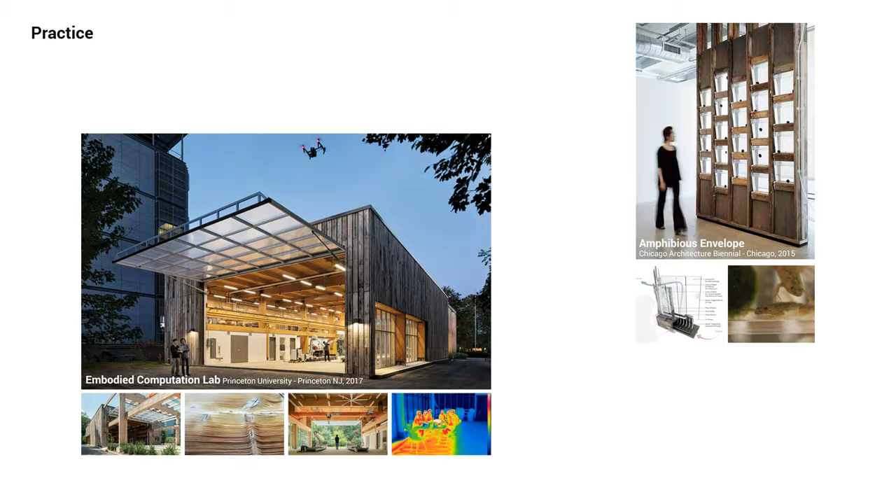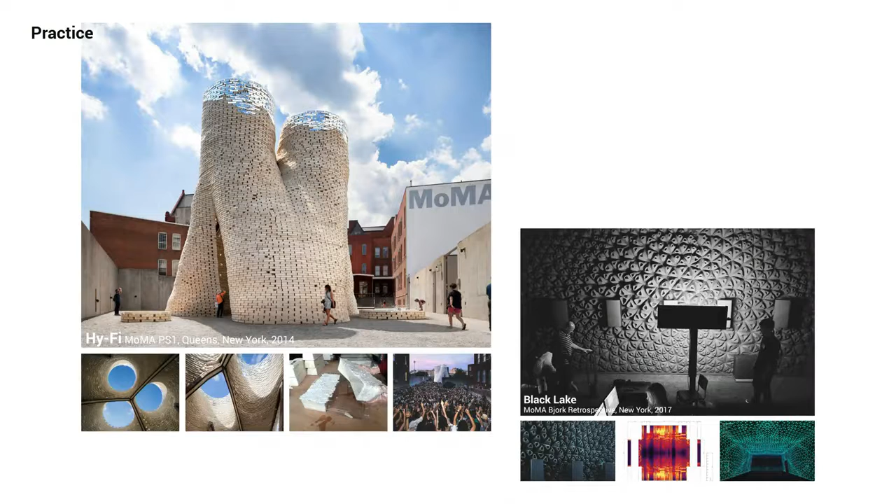Most of our clients are very different in nature. They vary from private corporations to local governmental entities to public and cultural institutions. Following the acquisition, The Living operates as a hybrid entity within the research division. On one side, we function as an experimental architectural firm and deliver projects of varying scope, scale, degrees of interactivity with the public, and varying degrees of permanency.

On the other side, we also pursue this research aspect of our firm. So at the end of each project that we deliver as a service, we try to extract what we think is the most interesting and forward-thinking piece of technology, workflow, or ways of making architecture. And these extractions become the foundation for independent research trajectories that often become papers. In this past year, we published several research papers in venues that you are probably all very familiar with, like ACADIA, DMS, SimAUD, just to name a few.

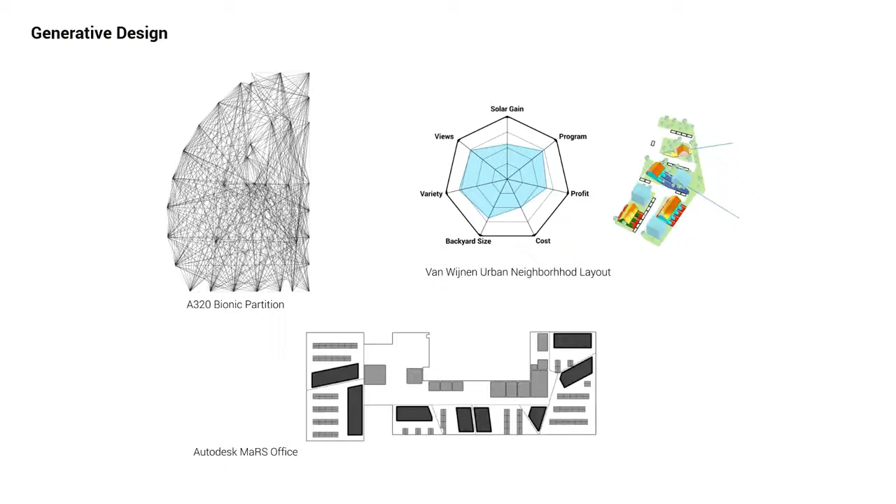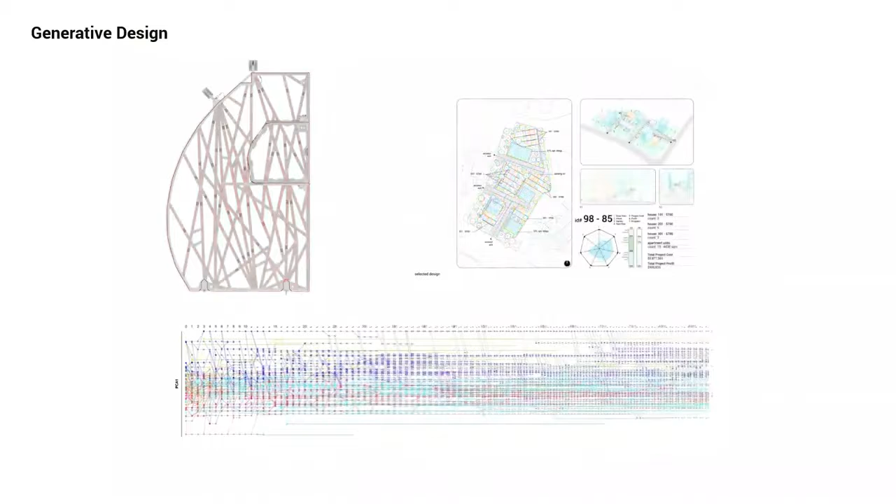So we'll start by trying to define what generative design is and explain some of the ideas and concepts behind it. Generative design is a hybrid design strategy that combines artificial intelligence and human creativity through an automated design workflow to discover high-performing and unexpected design solutions. And these are some of the latest applications of generative design on real-world projects.

Typically, generative design is constituted by 3 key components: a generative model that defines a wide design space of valid design solutions, an evaluative component that automatically scores and assigns numerical values to each design solution, and these numerical values are then provided to a meta-heuristic search algorithm that uses these scores to learn and adapt, generation after generation of designs, to create better, high-performing designs over time; in other words, evolve designs over time.

Generative design follows the ways living forms have been designed, and the way nature designs is through evolutionary processes. The key aspect of these processes is the role that species play and how they develop over time. They're encoded with unique genotypic and phenotypic properties. Through steps of mutation, crossbreeding, and selection, they evolve and adapt over time.

So given this context, we can better understand the underlying principles of generative design. In this way, we can define the generative model as what some experts call the expression algorithm. That is pretty much a mapping of the relationships between the genotypic state and the phenotypic state. And then we have a genetic algorithm that uses, again, the principles of mutation, breeding, selection and competition to evolve and adapt designs over time.

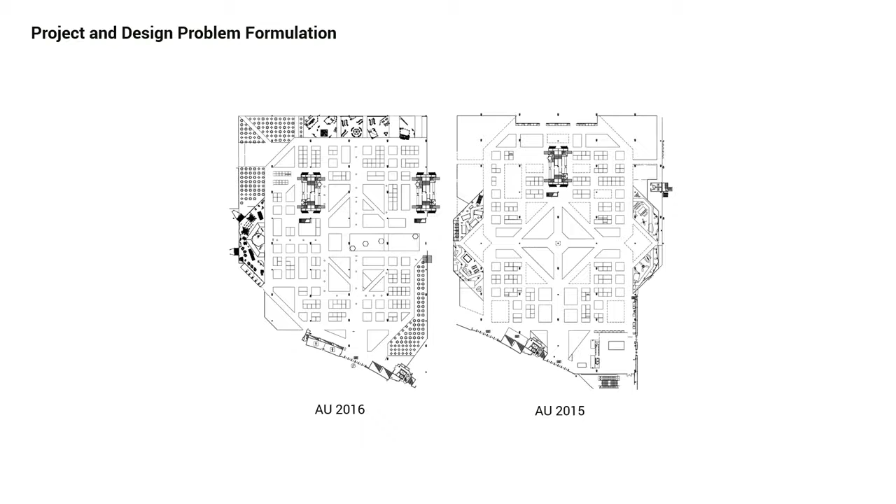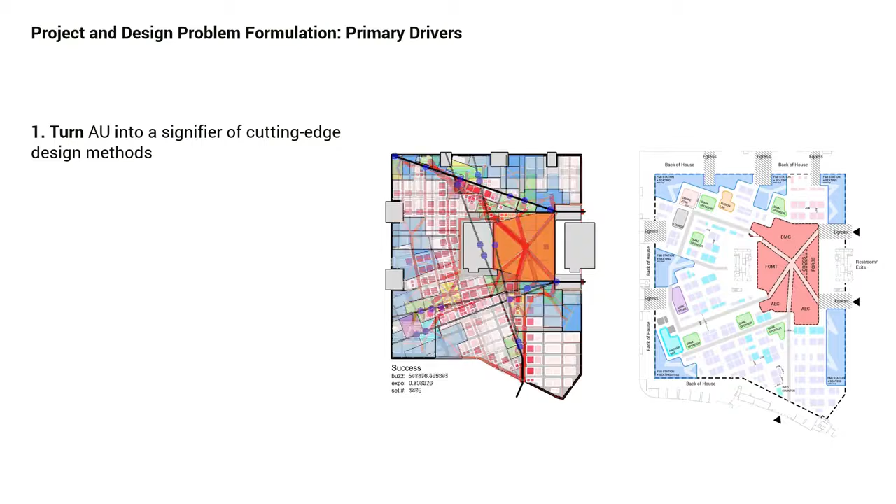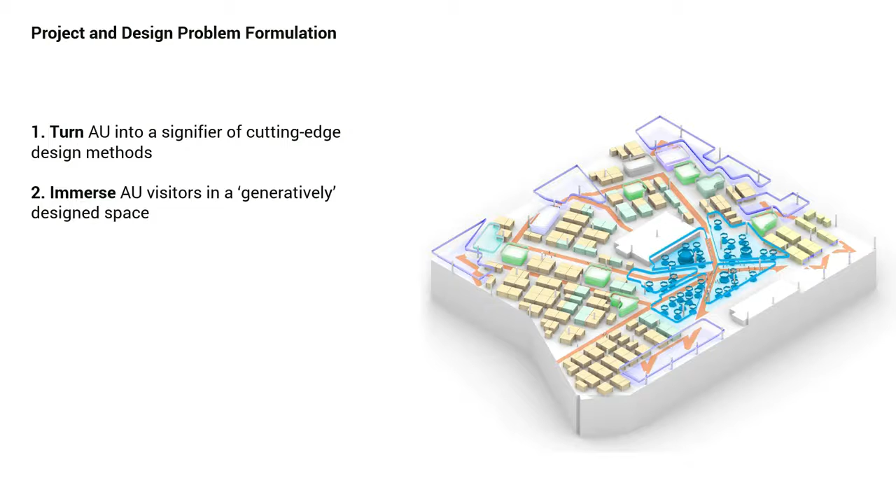So what we asked ourselves was, what if you started with fewer preconceptions about these design ideas, and your goal was simply to discover new and unexpected design solutions? We had three primary drivers at the beginning of this project. One was turning AU into a physical signifier of cutting-edge design methods. Two, immerse AU visitors into a literally generatively designed space. And finally, increase and redefine in a way the value of the booths through a data-driven process.

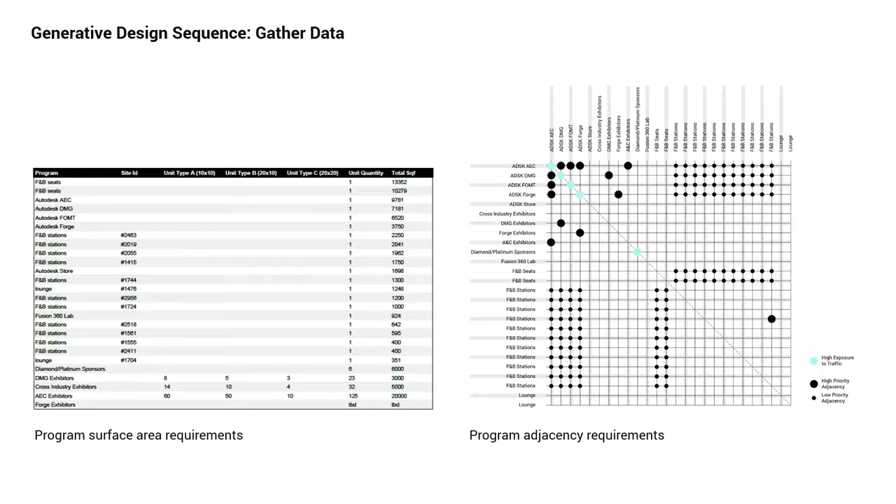Moving forward, we'll now show the sequence and the steps that we took to apply generative design to this project. There's a pre-generative design phase that requires the gathering of unique data about the project, and that can be encoded in the form of constraints and requirements into the model. And in this case, through a collaboration with the AU gallery folks, we gathered requirements about square footage for each pavilion and booth, and requirements about adjacency relationships between each program.

Constraints can also be geometric in nature, and these were as well encoded into the system. On one side, we have the fixed boundary of the exhibit hall, the location of the columns, egress access locations, toilets, and vertical circulation. But constraints and requirements can also be based on design decisions. So together with the AU gallery team, we understood that there was a strong desire to have a portion of the Autodesk Pavilion next to the two access points that connect the AU keynote hall and the exhibit hall. And so the big green area is a portion of the Autodesk Pavilion that then was allowed to grow and expand during the generative design phase up until it could meet its target square footage.

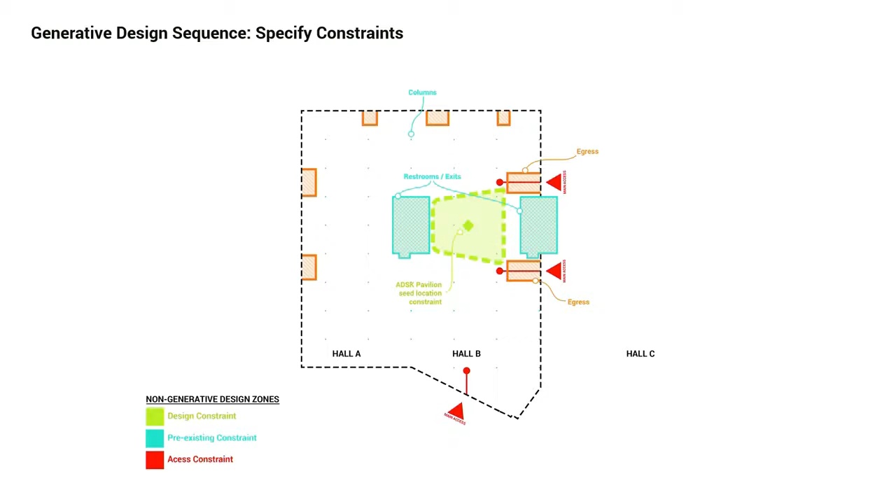Again, I wanted to stress the importance of what we've been calling the expression algorithm and the mapping between the genotypic state, which represents the set of inputs that the expression algorithm uses in order to translate that set of information into a fully morphologically expressed model, which is its phenotypical state. And more simply put, we had as genotypes a series of inputs. There were 23 numerical values. 3 values were used for the parametrization of the geometric model, and then 20 values were used for the parameterization of the placement of the program. And through a series of operations, as outputs, we had 2 design goals, buzz and exposure, which I'll explain more later.

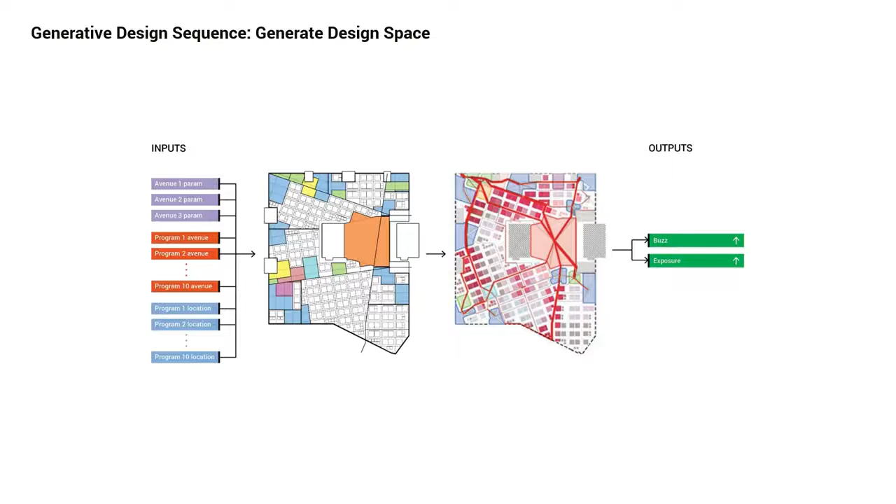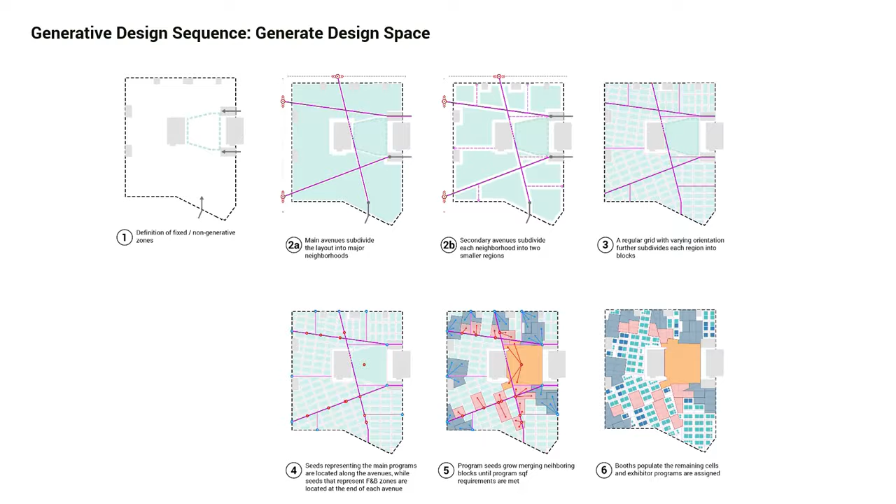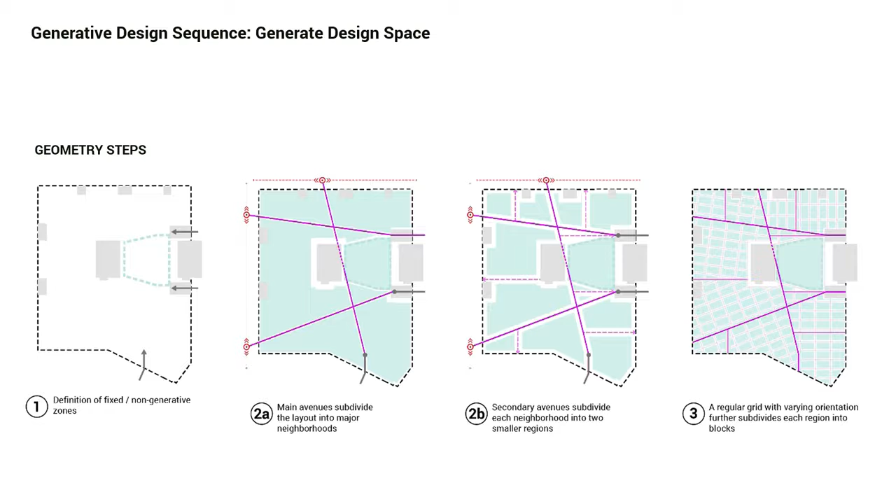Our geometry system is divided into 2 main steps. At the top portion of this diagram, you can see all the geometrical steps, and at the bottom, the parameterization and placement of the program. The geometry steps are a series of subdivisions of the entire layout space, from the definition of the fixed areas and geometric features that do not change throughout the generative design process, to the generation of 3 main avenues, which are fully parameterized and can move along the edges of the boundary hull, and these define an initial subdivision of the hull into macro regions. Then we have a series of streets that grow out of the avenues to further subdivide the macro regions into smaller regions. And then finally, each smaller region is discretized into cells through grids of varying orientation.

Following the geometric steps, we have the placement of the programs. So each program is represented as a seed, as you can see on the left image, with red dots and blue dots. Each seed, through a series of steps, grows into cells through merging operations, and the growth continues until each program reaches the target square footage. And in the final step, every cell that has not been merged becomes space available for booths.

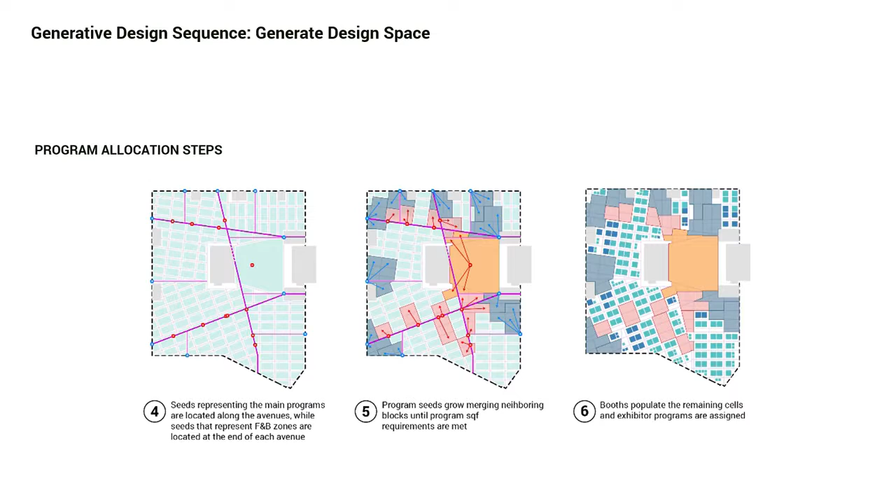One important requirement of the expression algorithm or the design space model is to be computationally cheap, so fast to be executed. And our model was very fast and pretty inexpensive to compute, especially because it was based on a novel graph data structure that we used for the merging and subdivision operations.

One important step of the generative design sequence is specifying and designing measures or design goals. And the two that we used were what we've been calling buzz, or the measurement of the amount and distribution of high activity zones throughout the entire floor plan, and exposure, which is the measurement of the proximity of each booth to these high activity zones.

The visualizations correspond to the way we're getting feedback from the model about buzz and exposure. For buzz, we had a web of red lines with varying thickness, and for exposure, a gradient from white to red, which corresponds to low exposure to high exposure.

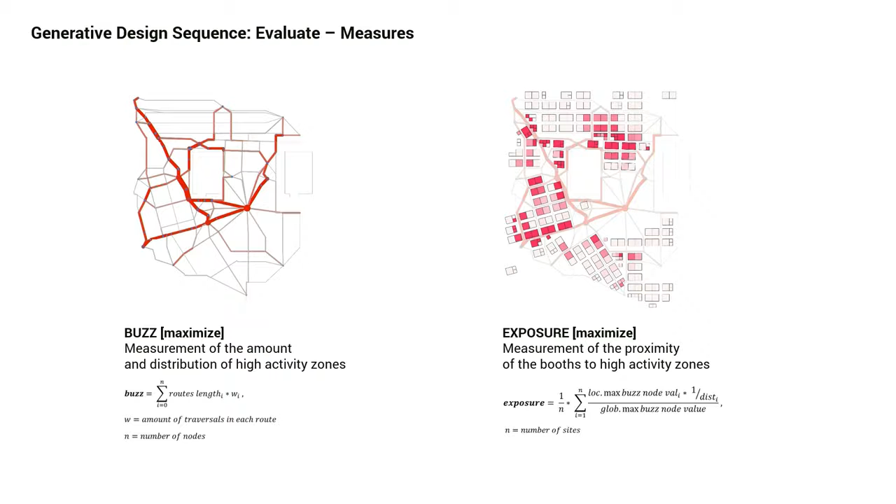Again, as mentioned earlier, a critical aspect of generative design is the relationship between genotype and phenotype. And because of that, we have developed a series of analytical tools to understand the quality of the design space. So it's not enough to just put together all the three components, generate, evaluate, and evolve, but there's also a lot of time put into calibrating how these components work together.

The two metrics were a range between bias and variance, which is a measure of the degree of variation or heritability of the model. While a high bias model is too simple to be used, a high variance model is too flexible, so we have lots of invalid designs.

The other metric is a range between complexity and continuity, which measures the ability of the expression algorithm or the design model to generate a design space with unpredictable, non-intuitive solutions. A model that is not complex enough is not worth optimizing, as the result can be easily determined.

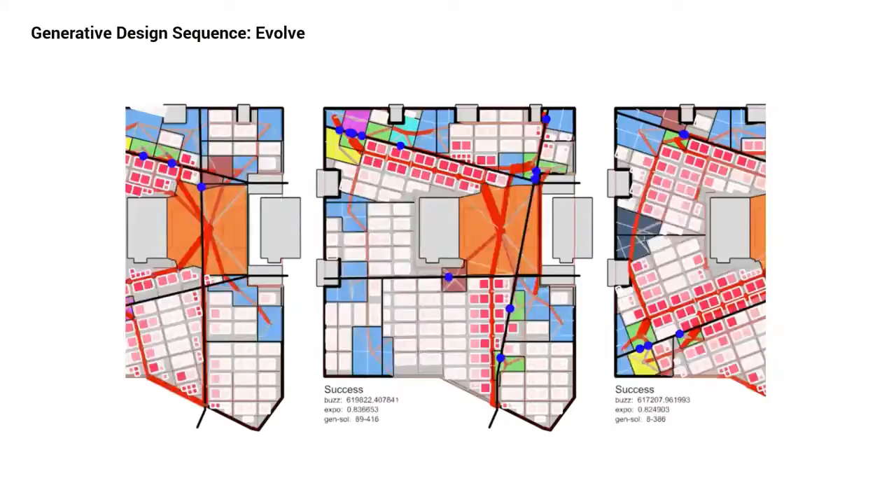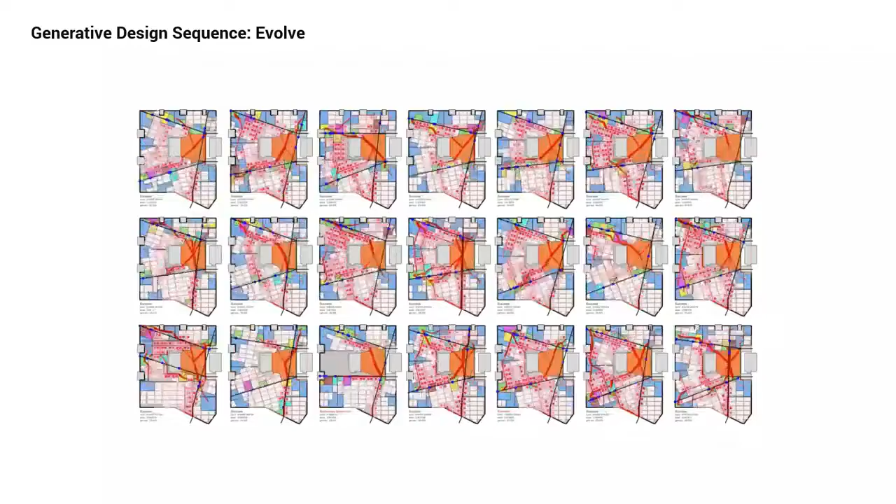By exploring the front of high-performing designs, we're able, together with the main stakeholders of the project, to nail down a smaller subset of high-performing designs that were not only really good as far as the numerical outputs of the design solutions, but through an in-house web app that was allowing us to explore the designs, we're able to visualize the designs and observe qualitative properties that the generative design workflow was not necessarily capturing.

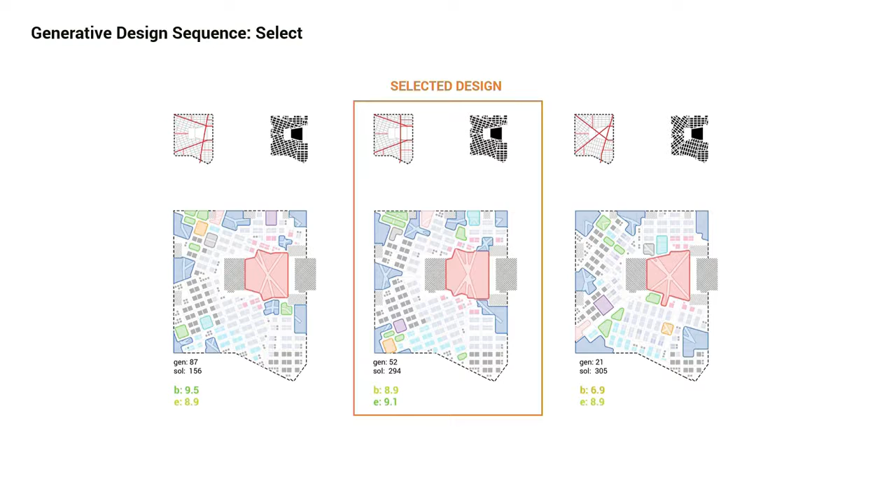This series of images are showing the progressive refinement of the design solution from,

Oops, Siri coming out.

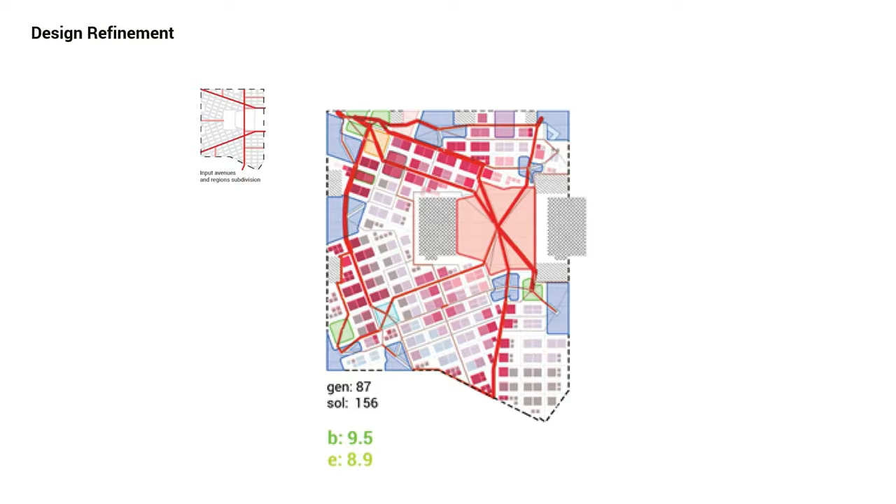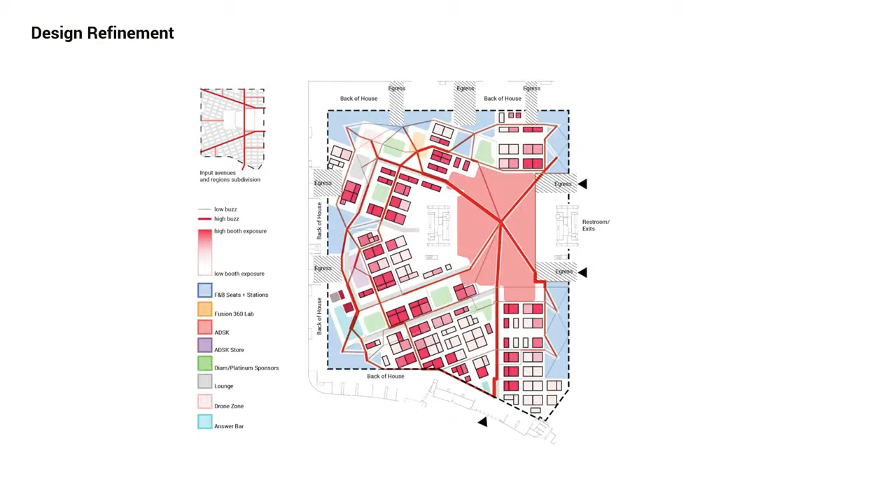The series of refinement steps from, sorry, someone called her. The series of refinement steps from the raw output from generative design to intermediate refinement that we did in-house to the final design that we delivered to the AU stakeholders. And as you can see, we used the high traffic paths to size and determine the main streets and avenues of the final design solution.

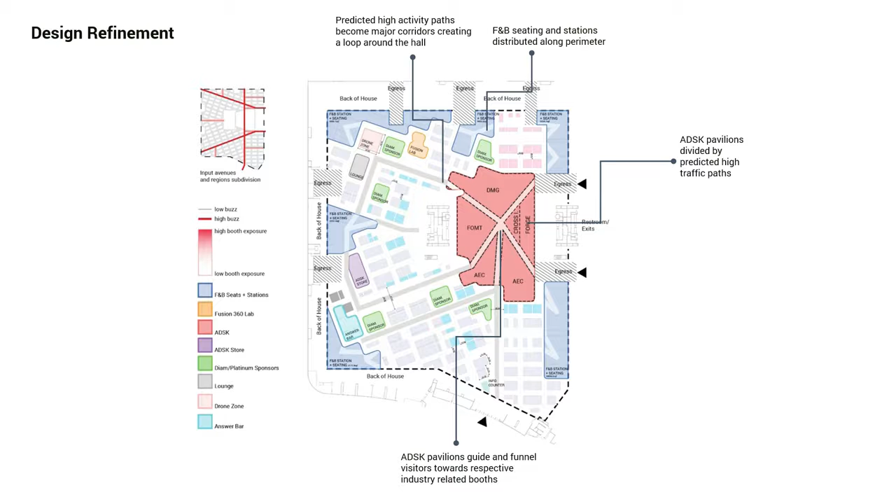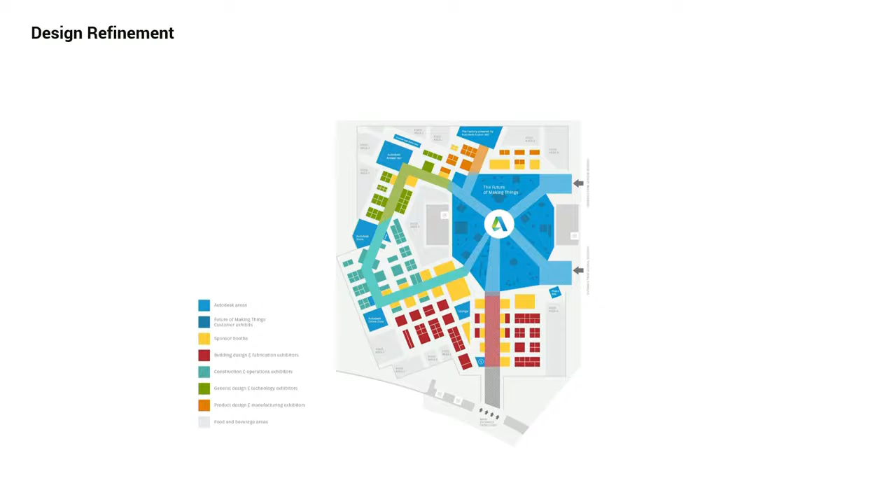And then finally, the space that you guys have probably seen earlier today, that the contractor of the exhibit hall refined themselves, making sure that the plan was meeting all specific requirements that may have not been captured by the workflow.

Some final notes about this overview. We had three main drivers: turning AU into a signifier of cutting-edge design methodologies, immersing AU visitors into a space that was generatively designed, and most importantly, trying to understand how to redefine the value of the booths and increase them through a data-driven process.

Ultimately, this process, generative design, allows you to discover unexpected novel designs, navigate trade-offs between high-performing designs, sketch goals and constraints rather than form, and it's a new form of co-design between human and computer. So trying to get as close as possible to a truly CAD software as Negroponte would have desired.

So this was the first part of the lecture. We can stop for a minute and see if you guys have any questions in the meantime before we move forward with the technical demo.

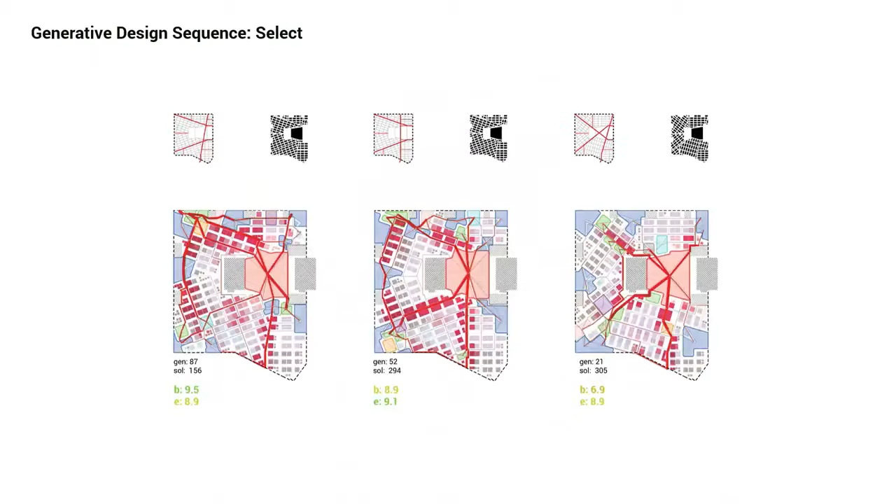It definitely requires a few cycles of testing of the entire workflow for the calibration that I was mentioning, the design space analysis. That requires running DOEs, or some low resolution sampling of the design space, in order to calibrate all these different modules. You don't want a highly complex design space because the search algorithm might not be able to find better and better designs very easily. You want that sweet spot between complexity and continuity, but you also want a sweet spot between bias and variance, which is the design agenda that we were talking about before.

But once that is set up, you allow the computer to suggest design solutions that you would not have expected by yourself. And only at the end, in what we've been calling the post-generative design phase, the human comes back in heavy-handed in order to refine the design solution. Because what generative design gives you ultimately is a design strategy that the human needs to work on and further develop.

Yep. This project, I believe, we started it in February, March, and in early April, I believe, it ended. So it was a very fast-paced, quick turnaround. Yep.

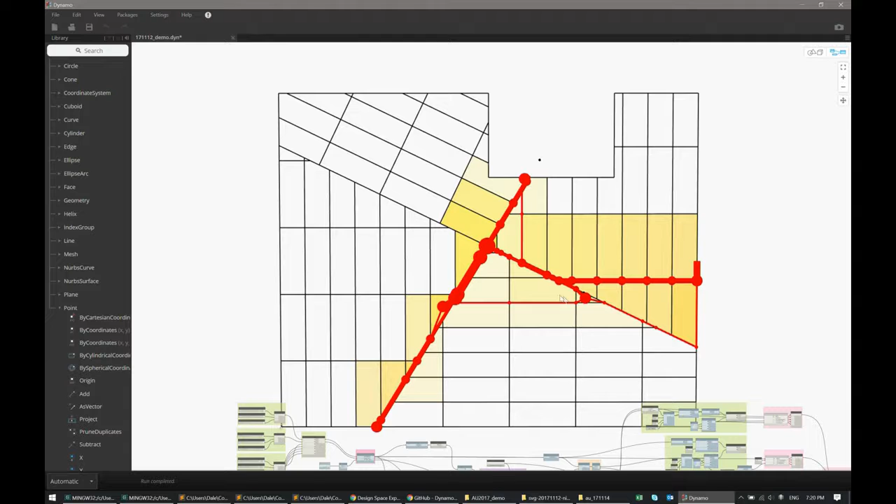And you see some of the visualization in Dynamo of the buzz metric, which is visualized as the red lines and nodes, which directly visualizes the predicted amount of people circulating along those paths. And the visualization of the exposure metric in this orange, which is showing the parcels in the floor plan that are most exposed to traffic.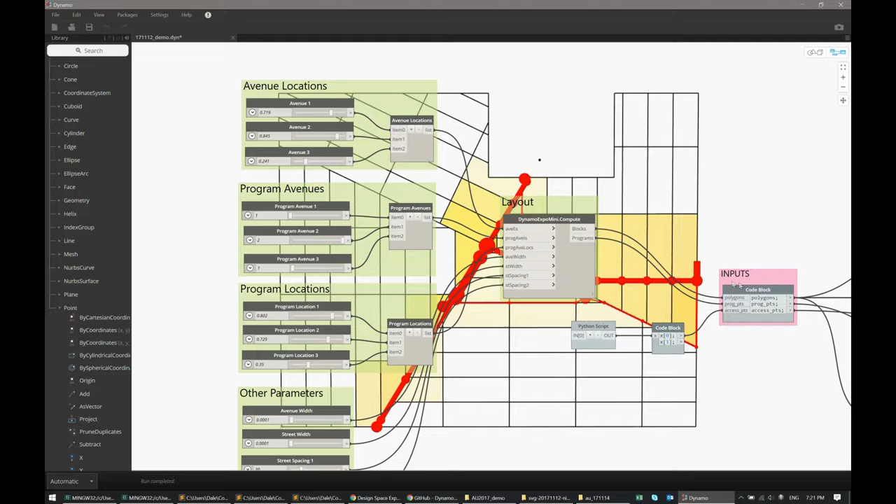So let me just walk you through a few parts of this definition. We start here with the inputs. As Lorenzo described, we have 2 avenues, but they're parameterized with 3 input parameters. We have 1 avenue starting at the main entrance, and then this point is parameterized along the opposite edge. And then the second avenue is parameterized as points along both edges. And if we change one of these inputs, of course, you see the graph update. So I move this avenue slider to the left, so this avenue is changing here, and everything is updating.

So when you specify these design spaces, in order to work with an optimization engine, the design space needs to be continuous. So that means that when you slide the slider, it's not just some random stuff happening. There should be a kind of correlation between any single input and how the geometry is changing.

But of course, we can have many, many inputs, so the design space can be very complex. But as Lorenzo mentioned, there's a kind of trade-off. We want it to be complex, so we derive solutions we couldn't think of based on our own intuition. But it needs to be continuous so that that algorithm can actually make the decision.

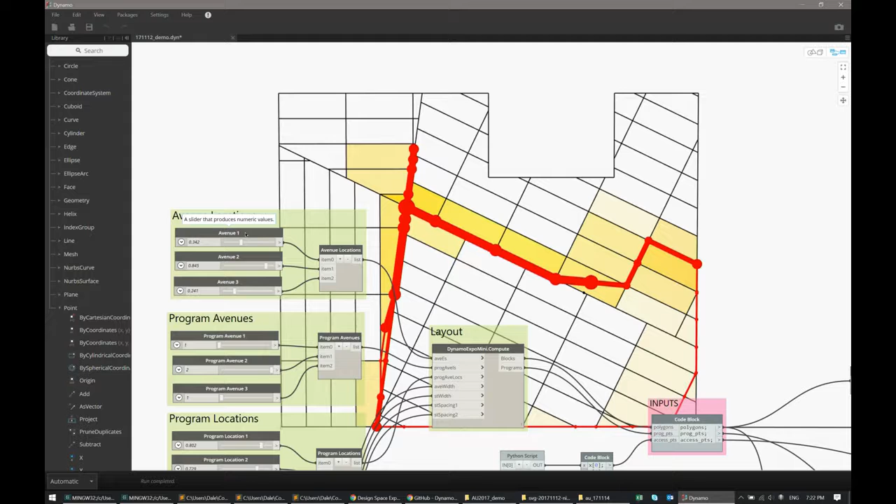Say, hey, last time I slid the Avenue 1 parameter a little to the left, that seemed to do better, so I'll try that again, maybe changing some of the other ones. Okay, so that's pretty important, the continuity of these parameter spaces. Although, just because they're continuous doesn't mean they need to be totally smooth. We have here program avenue parameters, which is a Boolean or a kind of integer selection.

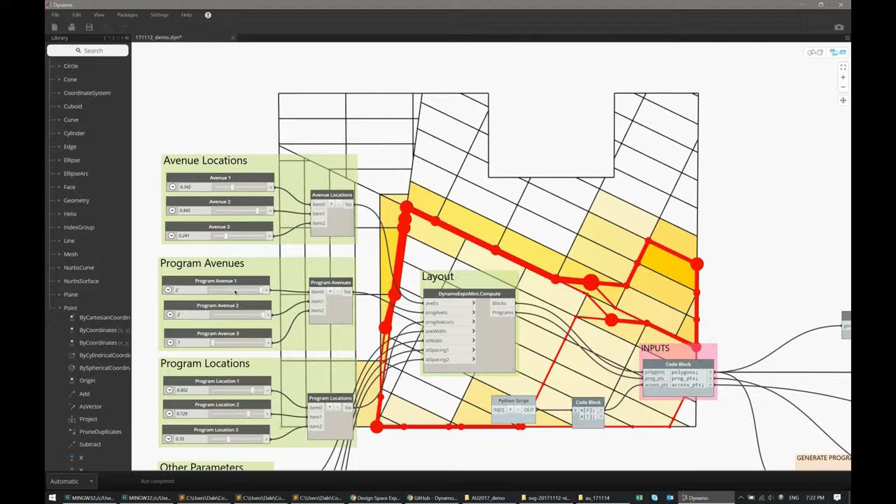So each program out of 3 is actually picking the avenue it wants to be placed on, either 1 or 2. So you can see that update as well. And then once it picks the avenue, each program can also, with a slider, position itself on that avenue. And then there's other kind of geometry parameters which are held as constants. So we don't need to vary each one of these during the optimization process. We can have constant parameters and we can have changing parameters.

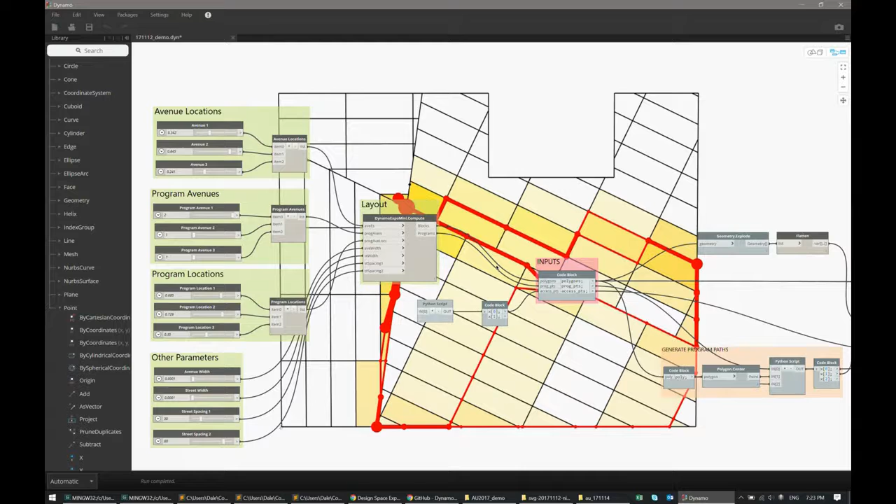So as you'll see, the definition of this design space looks just like any other parametric model you might use in your practice. But the key to thinking of it as a design space for exploration through an automated algorithm is being very careful about the specification of the input parameters, the knobs or the genotype that the algorithm tweaks during the optimization process. With traditional parametric design, it's made for us as designers to vary those, but here we need to think about how to specify them for the computer.

Okay, so once we have those parameters, they get fed into this layout node. So this is a first example of how we can start to customize Dynamo for our own needs, and we do this a lot in our practice. Dynamo is a kind of platform for us to develop our own solutions. We can develop those solutions by stringing together existing nodes that you find within the libraries here, or creating our own functionalities through code. So this node in particular is responsible for the entire process of taking this floor plan and subdividing it into these regions.

And we do that through direct access to the Dynamo source code. So this is one way in which Dynamo is very useful. It's completely open source. So if you want to develop your own node or functionality, you can dive directly into that source code and create your own nodes. So you can see on the GitHub repository, all the code of Dynamo is there.

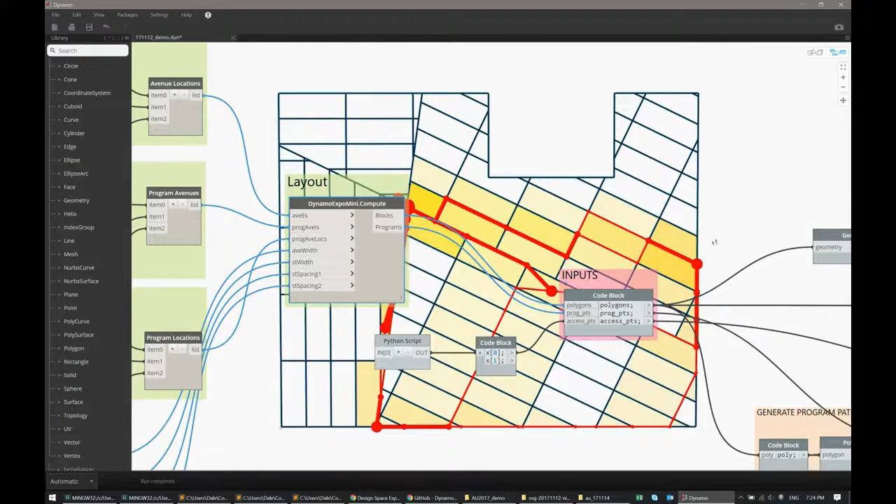So from this node, you get the geometry of the blocks and the program locations. For this part of the graph, we're actually just processing that geometry. So here we're converting those polygons to points and lines. And then in these series of nodes, we're taking the edges of the polygons and we're converting them to a graph representation. So the graph representation allows us to trace people or to compute the predicted paths of all the people through the space. And this is the second way in which we can start to customize Dynamo for our own solutions, is actually through writing Python code.

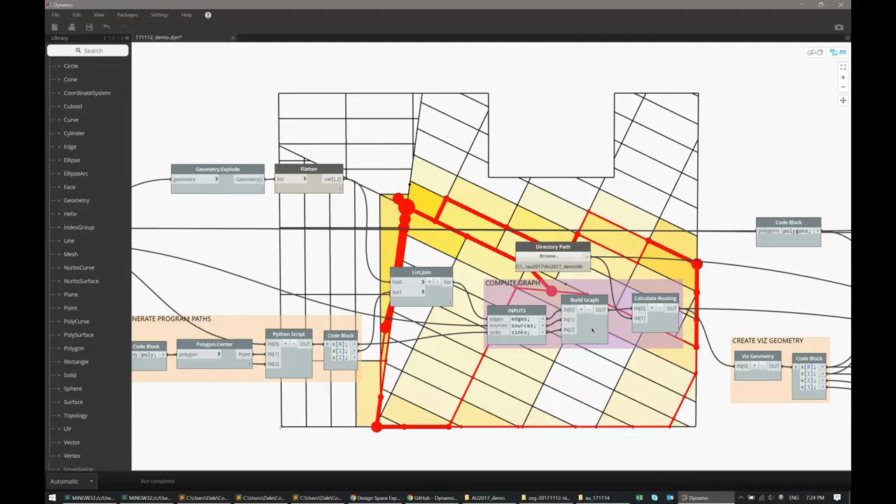So this is a bit of a lighter weight use of code within Dynamo. You don't have to dive into the source code and use C#. If you're more familiar with Python, there's actually a Python node in Dynamo. It gives you a script node here. You double-click, and you can start writing Python code directly. You see here one of the first lines is the importing of the DesignScript geometry module into this Python code. So all of the DesignScript geometry commands that are exposed in the included library are also replicated in this Python interface, which makes it really easy to use.

So here I have some code which is generating the graph representation. That gets passed to another node, which actually calculates the routing, the trace, the shortest path from each start and each endpoint. And here's another interesting tidbit here. I'm actually importing a library from my local folder, which contains some basic code for routing, which is called the Dijkstra algorithm. It's a kind of classic shortest path algorithm.

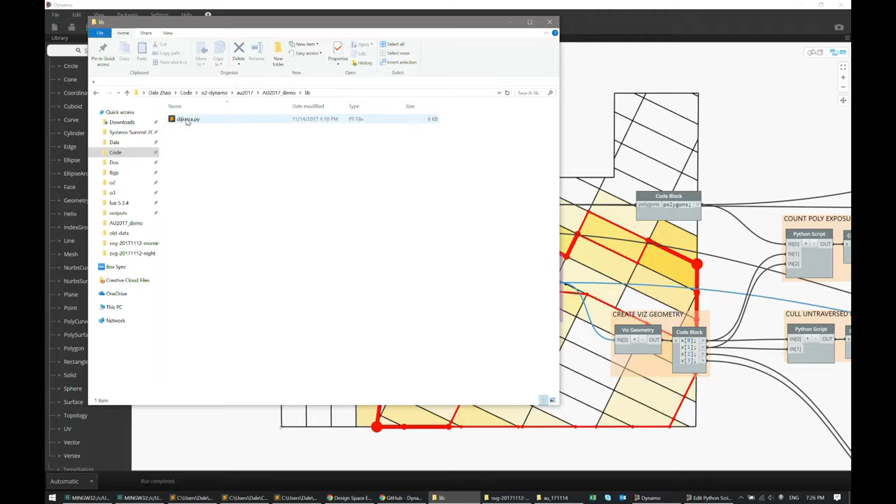I've actually written that as a Python file here in my library, and I'm able to import that directly into this Python node. So you can create your own Python modules outside of Dynamo and import them and use their functionality as a library directly within this Python node.

So here in the output, we have a data set, which is the graph representation that's storing all the traversed lines in the plan. So all the information about how many people are walking through each intersection and each line is generated here. Then we parse that data format to get the actual geometry out of the lines and the points and the number of people.

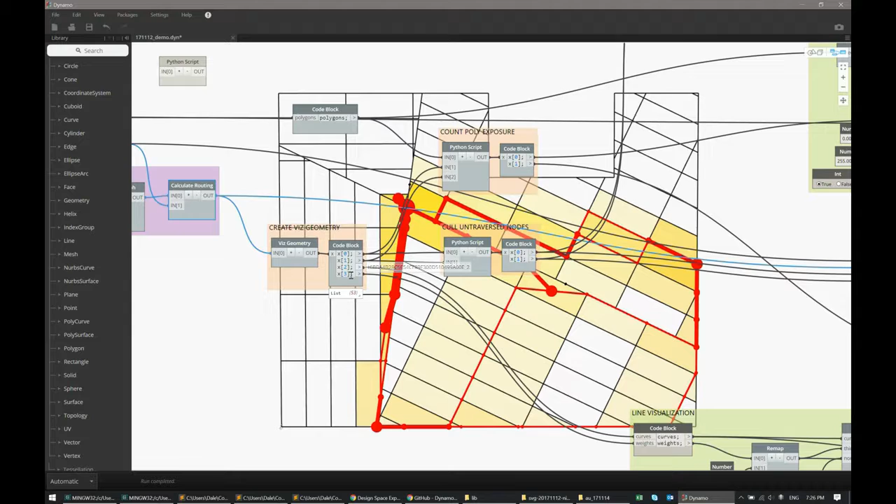Let me just do something quick here. So the watch node allows us to query these things. So here we have all the points of every intersection, and here we have the actual traversals, the number of people walking through each point.

Then there's some kind of utilities here, and here we get to the meat of the back end of the definition of the design space, which is computing the metrics. So the computing of the metrics is also part of the design problem, and that's very important to us as well. There's no standard way to think about quantifying or valuing an architectural design. Of course, we all value design differently, but the key here is to use the generative design process. We need to tell the computer very explicitly how we value each design.

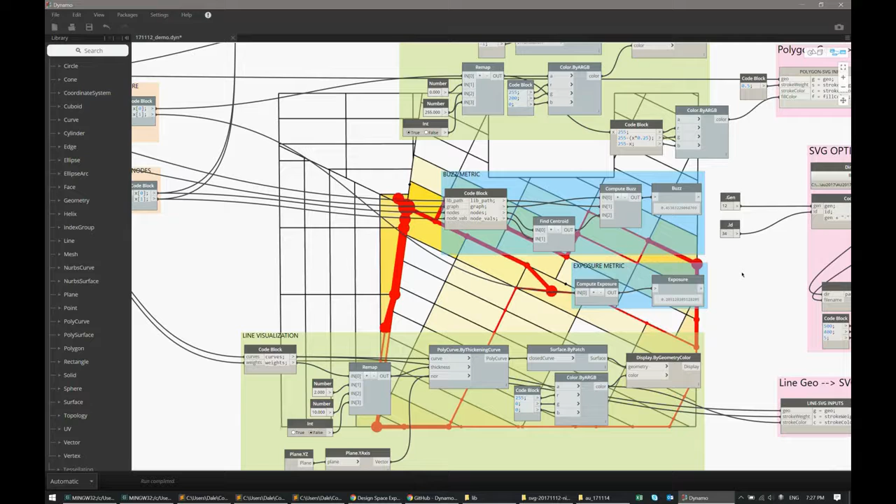In our case, we want to maximize this idea of buzz that we kind of came up with on our end, and exposure. So there's nothing universal about these measures. And in a similar way, just like we have to come up with what those are, we have to code them by ourselves. Again, we have Python code, which is handling that computation of the buzz and exposure metrics. And in the end here, you see two windows that compute that raw score.

So this is the key of the generative design process. You can use these algorithms to explore a wide range of designs, but it's just numbers in and numbers out. You need to tell the computer exactly which parameters it can vary to create different designs. You need to tell it a list of numbers to either minimize or maximize according to your preferences. So those are the blue parts here.

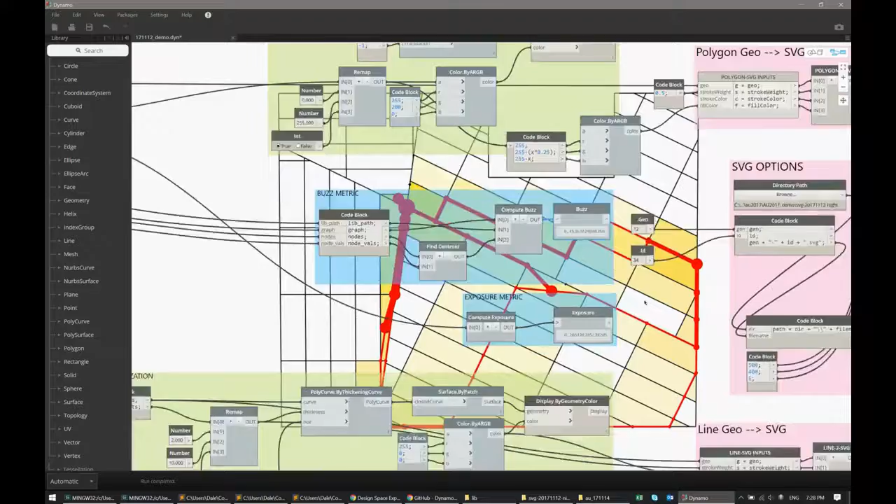The green parts are all visualizations within Dynamo. So in the latest versions of Dynamo, visualization has gotten a lot better. You can work with colors, also sizes and line weights and things like that. So you can see that here is the visualization of the nodes, the blocks with the orange, and the lines with the red thickness. So that's basically it.

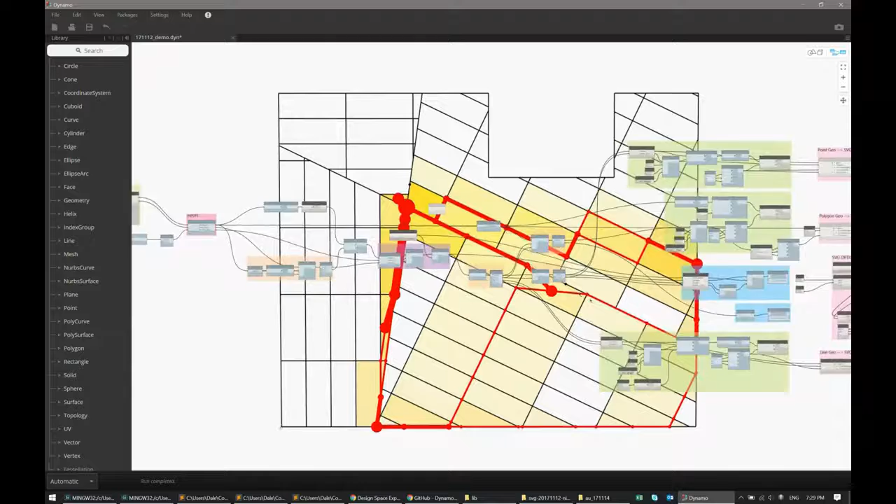At the end here, we have some custom nodes that we wrote also in Python to actually export SVG images of each design. So we can take the designs here, and just like we're visualizing them in the Dynamo interface, we can export individual images of each one, but as scalable vector graphics, which allow us to look through the designs later and also visualize them. OK, so that's the setup of the model. We can come back to this if you guys have any questions. Let me just skip forward to the optimization part right away.

So to do the optimizations, there's a variety of tools. There's actually a library built into Dynamo called Optimo that you can use. In our studio, because we're kind of like expert users of these kind of algorithms, Dale has been working on, for the last year or so, an in-house optimization platform called O2. This is a kind of external library that can interface directly with Dynamo to run the optimization.

So I'm going to do a kind of baking class demo here where I'm going to run the optimization. We'll see the designs generating, and then we'll cut quickly to the visualization of the final optimization run. Okay, so very simple, O2 run. We start the process. Now, O2 is actually launching a headless version of Dynamo in the backend, so you won't see the designs changing here. It's actually a separate Dynamo process that's launching the model, tuning those parameters, and getting the outputs out.

So you see here the designs getting generated. We started with the second generation. So this is a run that was already done before, and we're just restarting it at the second generation. Here you can see the 9 inputs being generated and the 2 outputs coming out, and you can see how fast each one is executed. It's pretty fast here. We can run 10,000 designs, like a 100 by 100 experiment, in a few days. But again, this can be easily parallelized.

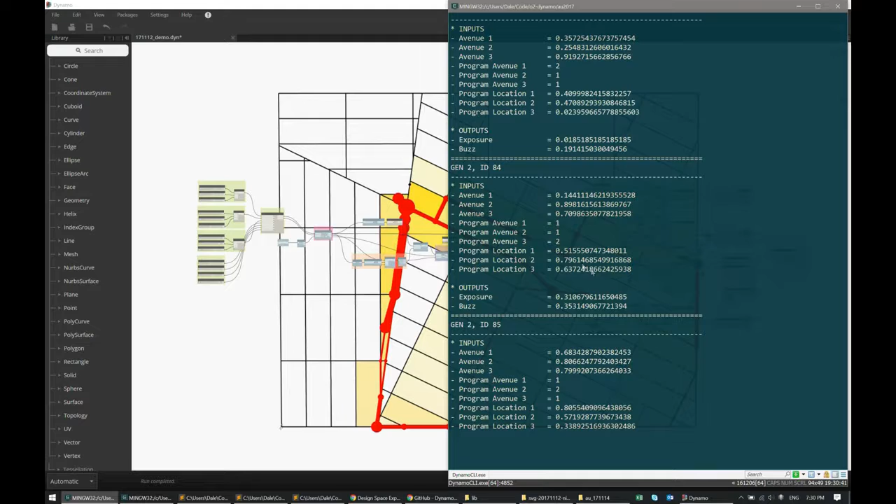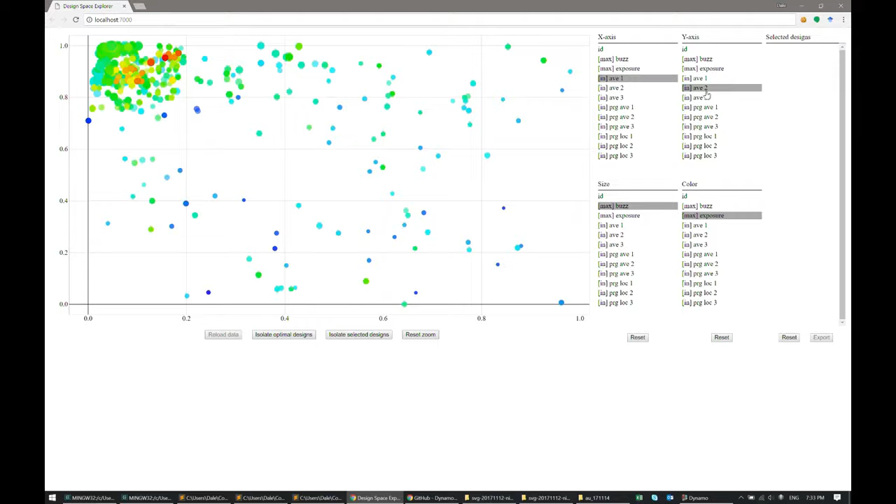We can also visualize, for example, the sensitivity of input parameters to outputs. For example, we can look at one of the avenue inputs versus buzz and see that there's something in the lower range of that metric, which equates to higher buzz. We can also use color and the size of the circle to look through these designs. We can select certain designs. So this is a demo fail, by the way.

So as Lorenzo mentioned, especially when you're working with multiple objectives and trade-offs, the design process doesn't start with the optimization, and it doesn't end there as well. Before we do optimization, we have to take a lot of care to design our design space models and evaluate them. And then once the optimization is done, it's up to us as the human designer again to look through the results and figure out how to select our best designs.

And in our studio, we follow this process a lot. And the way that we use the results of the optimization to craft the final design is also varying. So sometimes there's a single design that's the most promising, and we take that and we refine it further with additional design criteria. Sometimes we just use this process to explore a range of designs and learn some techniques or strategies that are actually quite useful.

It's just a process that lets us use computation to explore more design options, but at the trade-off of being much more explicit. So before these algorithms can do their thing, we need to be very explicit about how we set up the design problem, how we tell the computer about the design problem, how to evaluate it, and then, of course, running these optimizations.